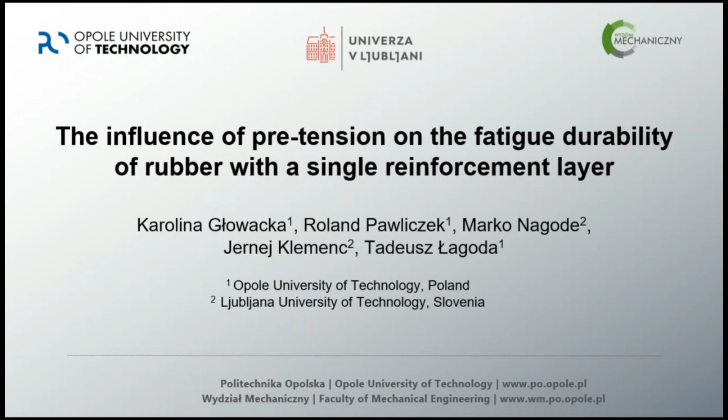Oh, yeah. Arrow down. Down? Okay. Okay, thank you.

Okay, so as I told before, it's part of the common project in which we are analyzing fatigue tests, of course, to get information on the degradation of the material. We also try to be as close to a real situation as possible, because it's always good to have some idea where it could be used in industry. And of course, it's worth analyzing how this pre-strain affects our material.

I don't know, it doesn't listen to me. I put it down, but nothing happens. Could you please help me? Okay, thank you.

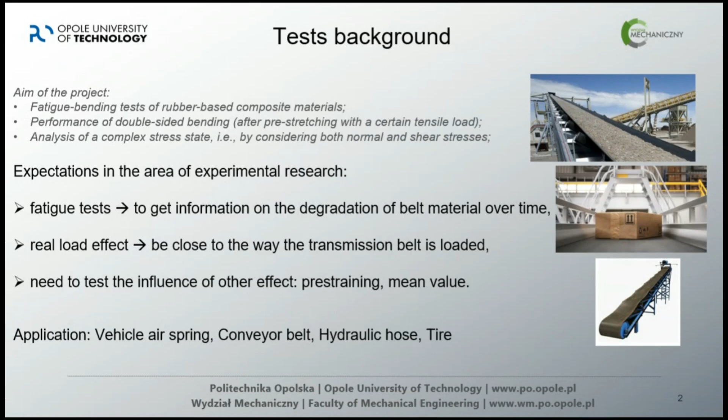So the aim and scope of this presentation is first to investigate the fatigue behavior of rubber with a single nylon cord. I will show you a picture of what it looks like, but it's like in composites. In classic composites, we would have 0/90 fibers arranged, but here we have cords instead of fibers.

In my presentation, I will verify whether and which fatigue characteristics can be used, and analyze if the pre-strain affects, and in which way it affects, the experimental results. We conducted double-sided cyclic bending, which resulted in almost pure tension. I know that during bending we have the tensed part and the compressed part, but because of the design of the test stand, it resulted in almost pure tension. I will justify it later.

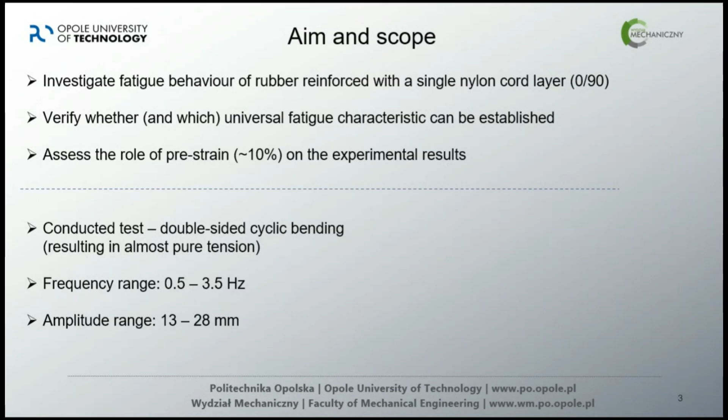But we had one issue, because in the literature you can see everywhere that when it comes to fatigue of rubber, the material starts to heat up. And because of it, some problems appear. So this is why we analyzed different frequencies to check how exactly our material behaves in this situation.

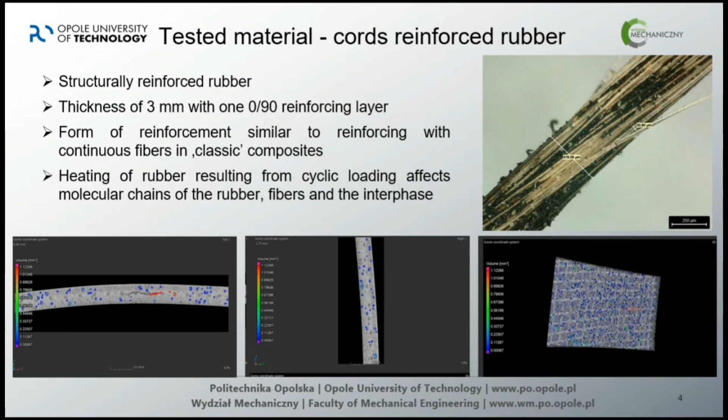Okay. So I told you about the test stand, which resulted in almost pure tension. Because rubber is very elastic, we can put a lot of strain in it, and it would just slip out if we didn't fix it. So we fixed the material here with a piece of metal, and here. So when our actuator was moving up and down, the material couldn't move. This is why we didn't have classic bending, meaning a tensed part and a compressed part. We had almost pure tension in this part. Of course, we had some bending in the supports and in the actuator, but that will be the topic of further studies.

We also had a tensioner in here. So when the specimen was fixed in these supports, in some specimens we analyzed just this situation, and in others we put extra tension of more or less 10%. Of course, then we analyzed the exact value, but it was from 9 up to 11, so let's call it 10.

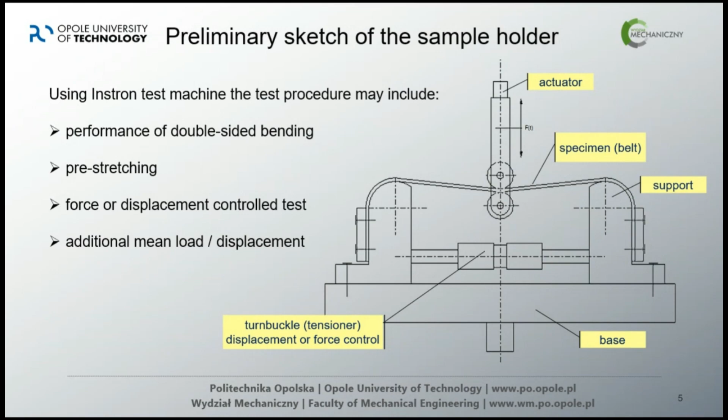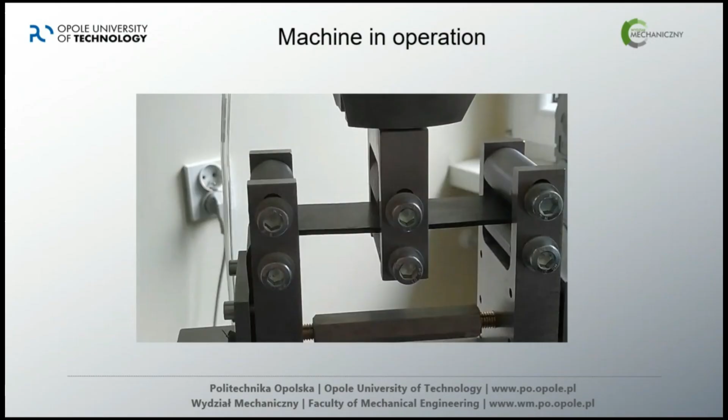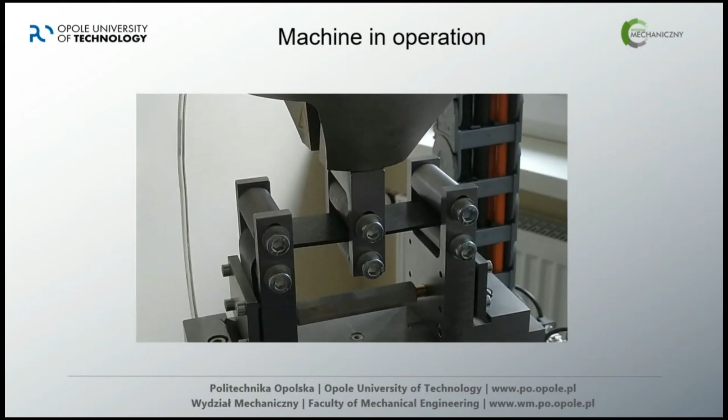Now I will show you the machine in operation, how the test stand works, so that you can understand it a little bit better. Here we have very small amplitude and very small frequency, but I think during this film you can understand why we had almost pure tension in our specimens. Okay, now a more interesting movie with larger amplitude and higher frequency. So now you can see how it worked when it was supposed to work faster.

So as I told you before, we expected to obtain shorter fatigue life due to heating of the rubber, so the molecular chain changes. Everything could happen especially on the interphase, but also in the rubber. But our observation was kind of surprising: even though everywhere in the literature we found that fatigue life should decrease, it didn't change anything actually. We did tests at lower amplitude, lower frequencies and higher frequencies, and the results were very similar.

The main difference was the shape of the hysteresis loop. When it was slow, the hysteresis loop was very smooth, but when we used a higher frequency, the hysteresis loop was very sharp, let's call it.

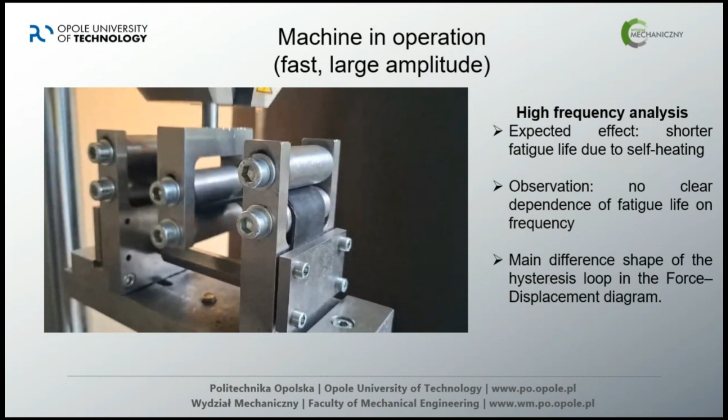Okay, we had some issues analyzing the fatigue life, because the first thing is how to define when the material cracks, because it's not so obvious. So we couldn't see the real cracks sometimes. Sometimes we did. Sometimes we found just cracking of the material, but sometimes no. So we were looking for a good solution.

And the best one for these materials especially was 50% force drop. When we found that the force dropped to 50%, we knew that the material failed. But it's not so obvious, because now I'm telling you about the 0-90 situation. But for the plus minus 45 degrees, more interesting things were happening, because, of course, some specimens behaved like 0-90.

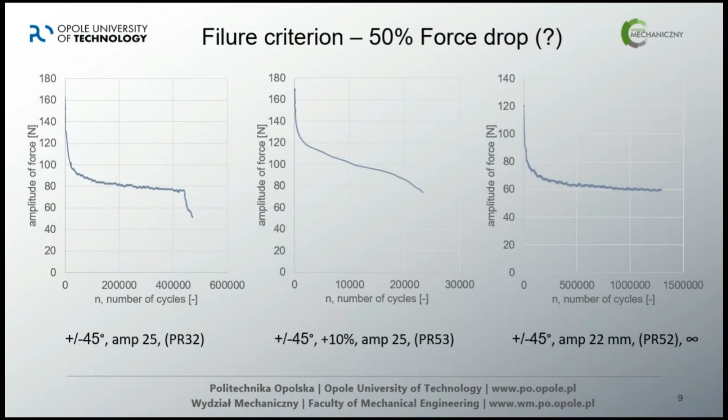But in the case of the same specimen with pre-strain, 10% pre-strain, this graph isn't so obvious. And also when the amplitude was low, like here we had 22 millimeters, it's not very low, but in comparison with 25, it's lower. The shape of the diagram looked like this. And we didn't even obtain the 50% force drop, but I saw the specimen and it was totally failed.

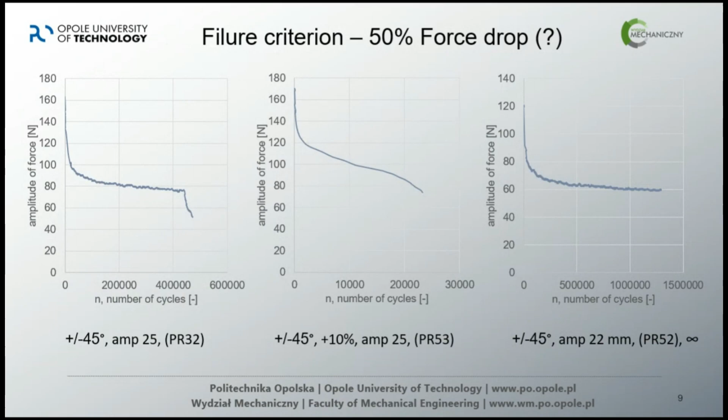So in case of our 0-90 specimen, of course, we can use the 50% force drop, but I wouldn't call it a universal solution. We have some issues concerning this thing.

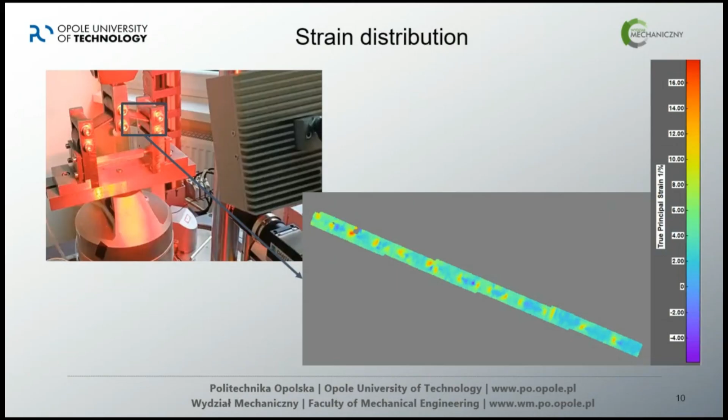Okay, so now moving on to the fatigue characteristics, we had two ideas. The first one was to take the amplitude, the strain range. I will tell you what's happening here, because the actuator moves up and down, up and down, up and down. But what happens in the material?

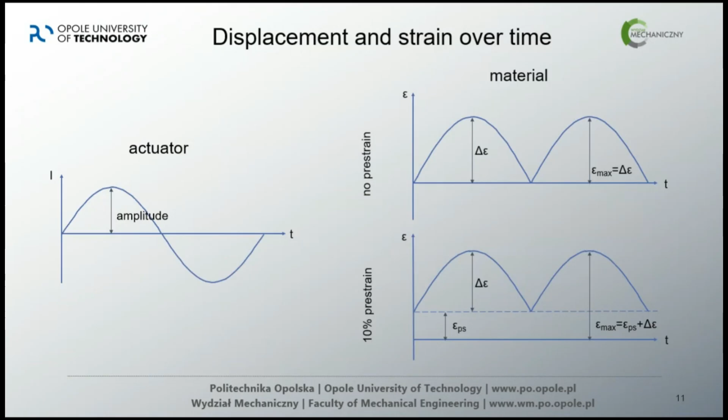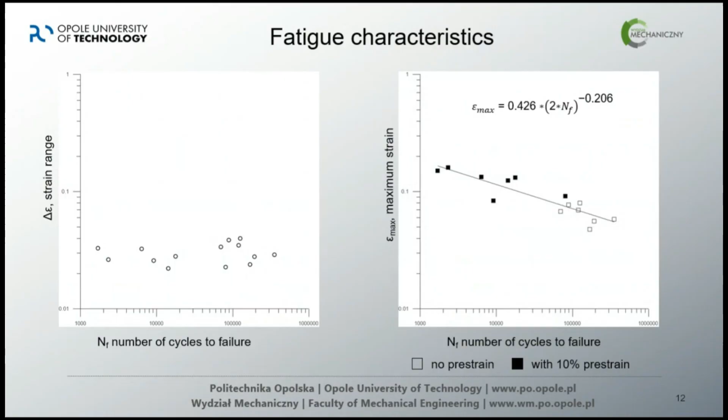So summing up, the most important is that the fatigue life is well described by this maximum strain versus cycles to failure characteristic. And the relationship is universal. It doesn't matter if we had pre-strain or not, it just gave us a little bit of mean stress effect. The pre-strain increased the variability. It's consistent with general rules, and it's good to analyze it for the real-life material.